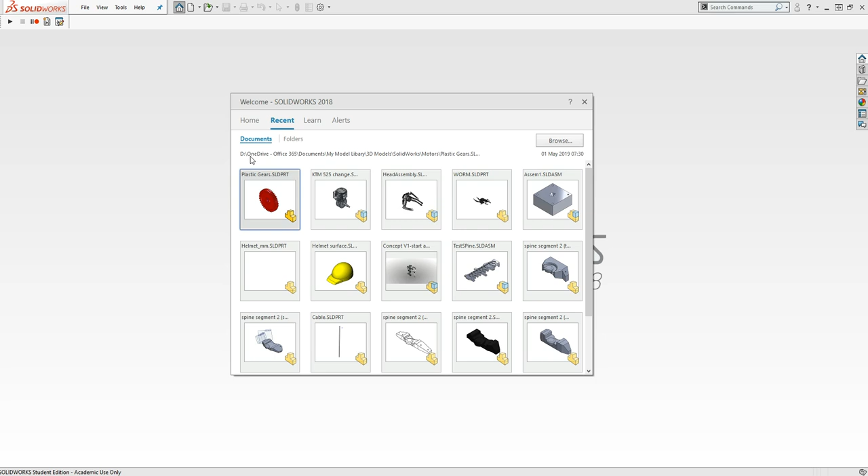Again, this was downloaded from GrabCAD - plastic gears, little plastic gears. Whoever did this did a cracking job, because all he's done is use design tables, so you can have the full range of gears in one part.

So those of you comfortable with design tables will know exactly what I'm talking about. I'm going to nip over to the configurations manager - click onto it, and you'll notice he's gone through every single option for these nylon gears. Cracking job, I'm really impressed. So I'm going to double click onto my 40 teeth configuration. Boom, happy days.

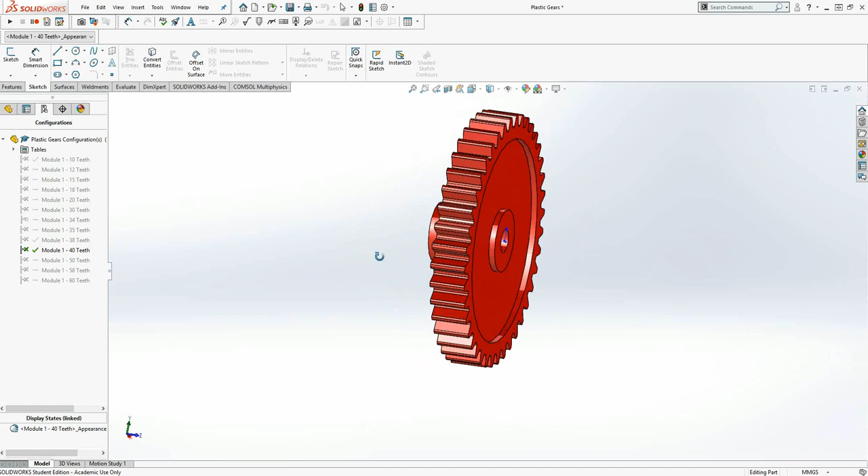There's a couple things I'm going to do first - just give it a bit of a spin round. What I actually need is I want MATLAB to do all the moments of inertia for me. I'd like it to be as accurate as possible, so I can play around and be pretty sure about what's going on with it.

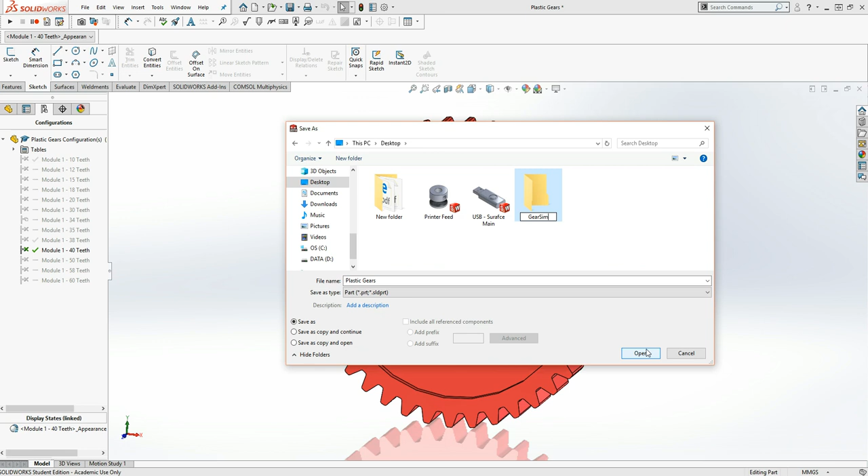So what I'm going to do is go to Save As, go to the desktop, and create - we'll call it Gear Sim. Double click into there. Now don't save it as a part - I'm actually going to export it as a step, AP214.

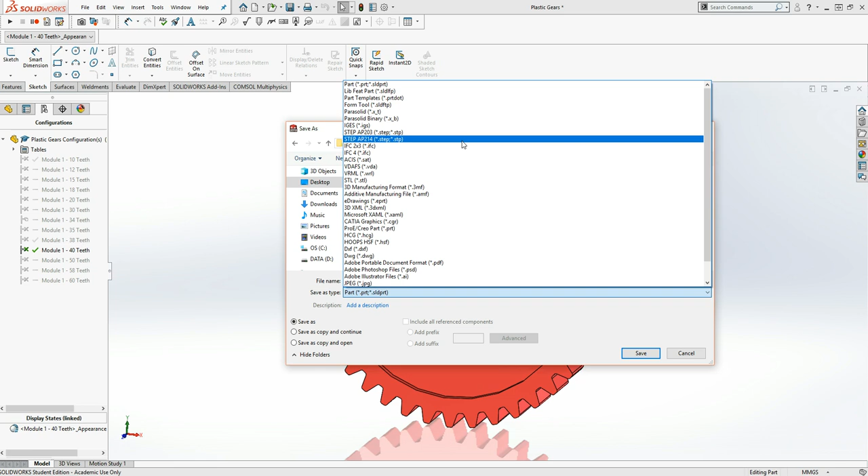The step files, they claim they're a lot more accurate - the resolution on the clouds are far better, and I won't lie, I've actually found this myself. They are very good, very good.

So I'm going to go plastic gear, change that, and I'll call this teeth 40. Save that.

To keep this as simplified as possible, I'm going to go from 40 to 10, so my ratio is practically at nothing.

So 10 teeth, do the same again - Save As, go to Desktop, Gear Sim, step AP214, and there's my step 40. Oh, I nearly overwrote it - I'd be very upset. And I'm going to change that now to 10.

Just to let you know, the reason it's doing that is because of the configurations table here. Technically this part has one name and is recognized as one part, but the configurations table allows you to have variations. It's great, I love configurations.

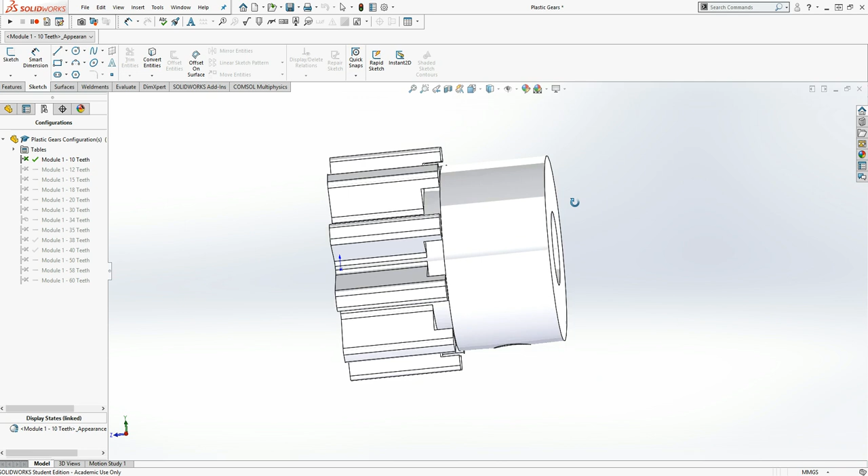Clearly, I think that's coming across. So I'm going to save, and now we should have 2 step files. Let's check it out. I'm going to double click into my gear sim - wrong screen - 2 step files, happy days.

If you've not done already, start up MATLAB. Once you've started MATLAB, sorry, I'm just getting everything in the right place.

So everything starts up. Now this is something you need to keep in mind and always remember about the paths. What we're going to do is tie all these paths together, so that when it runs, it will always look for the step file and can always import it. If you don't add the path to the step file, when you next run your simulation, it will crash. So keep that in mind - always add your path. So go back to Gear Sim.

I'm going to right click, scroll down, add to path. We can just go folders - I always go folders and subfolders. It's just because I've had some bad experiences before where I forgot to add the subfolders and it crashed, and it left me going berserk. So I do this even though the subfolders element is a redundant action, but I add it anyway.

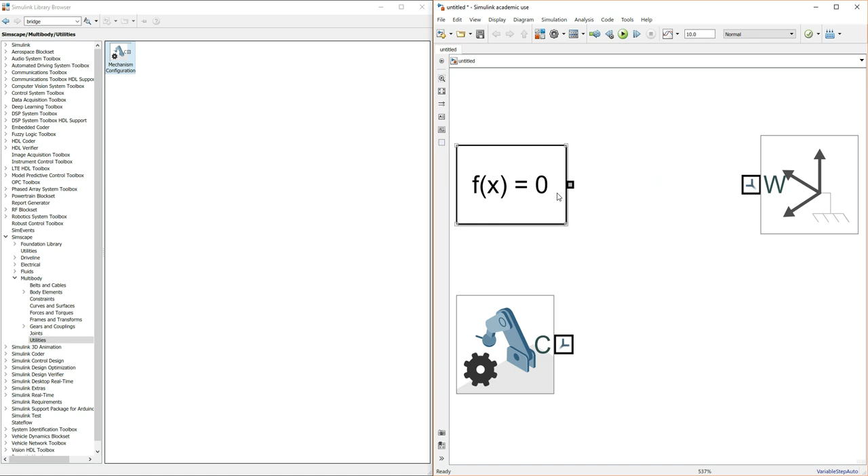So what I'm going to do, first things first, Simscape utilities - I'm going to use MATLAB's solver methods, because I trust MATLAB. Then I'm going to go to frames and transforms. Need a world - we need to establish where it is, and what that relation is going to be. Let's spin that round. And finally, if you remember, we need a mechanism configuration. Or I can spacebar - so I'm going to spin that round.

Now at the minute, because we're going to be driving through torque in this case, or we could drive through momentum - we could say what our angular momentum is. As you know, this system will allow us to choose however we want to drive it. It needs to be realistic, so don't start to think that you can measure torque in meters or measure fluid in millimeters. It's just a stupid, silly ratio, but you know what I mean, right?

If you remember from the last one, I was always talking about it needing to know exactly what that first level of relation will be. Now all we're going to do is get the 10 gears to interface with the 40 gears and then just drive. This simple process will allow us to look at how it interfaces, and if it's right then we can crack on. However, if we need to change things, it's quite easy, dead straightforward.

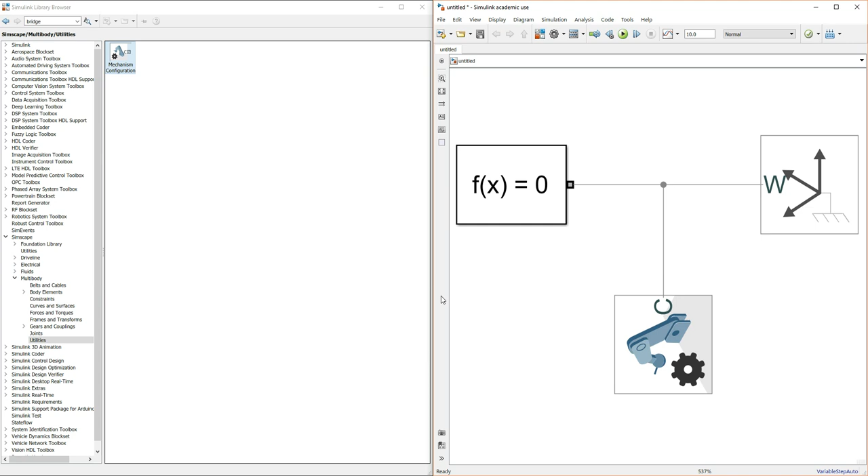So first things first, let's start bringing in that relation. So for frames - apologies, not frames, joints. I'm going to try and get everything to activate itself in the Z plane. You know what it's like, it just means I don't have to mess around with trying to figure out where everything's going to sit. It's me being extremely lazy, but one thing I've learned about this system ever since I was doing it for my PhD: try to simplify everything that you're doing.

You're simplifying this process as much as possible, because yes, this is 2 gears, but what if it's a gearbox? What if you're then looking at nubs between each point? What if you're looking at a new type of bearing? You want to try and prioritize that bearing, but make sure everything else has a simplified approach to it, because it's purely Occam's razor, where the simplest answer tends to be the right one.

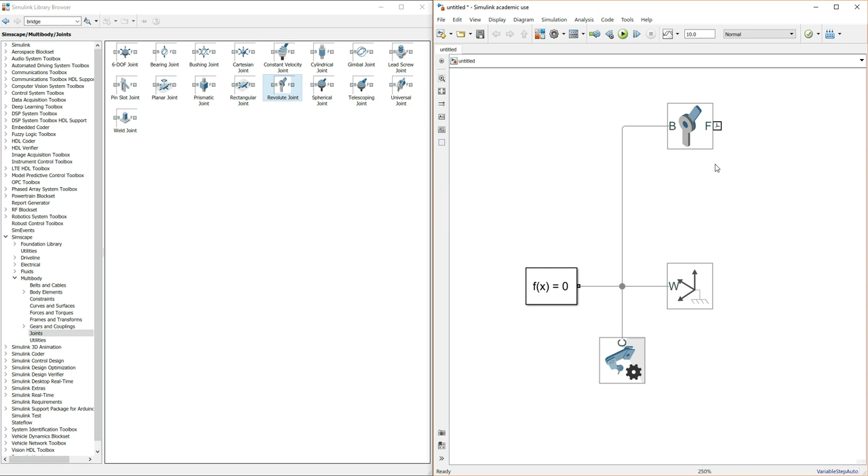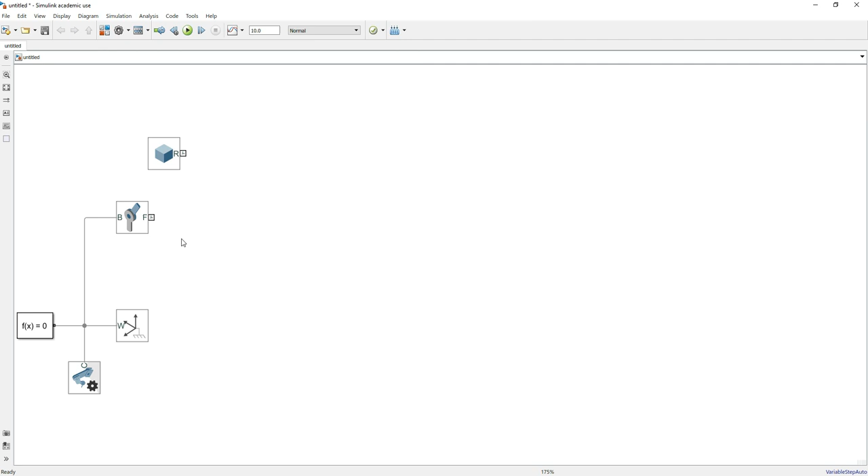So we've got our rotational joint. Next thing - all this is saying is what we're going to add to it will allow it to rotate. It's actually not saying anything sophisticated and sexy past there. What I'm going to do is go back to Body Elements. I'm going to bring in a solid. What I am starting to do now though is move a bit quicker, just because we've gone slow through a few things - we're going to move a bit more with some excitement to it. Now I'm going to rotate this round.

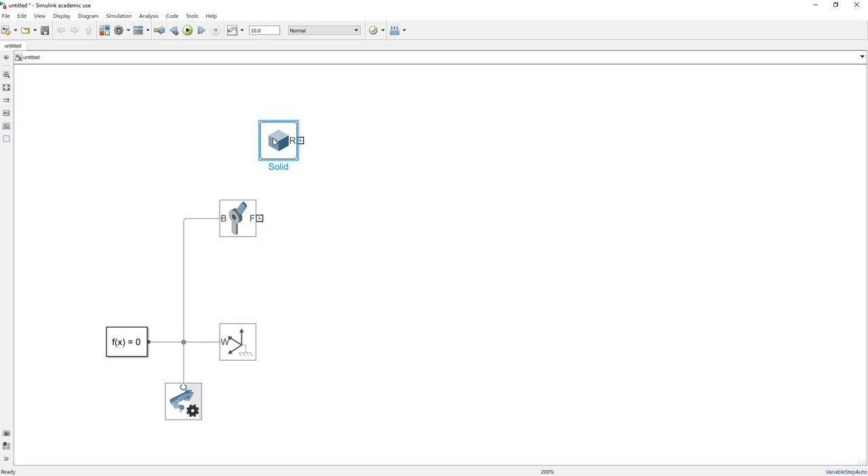I want to hang this off the top - you'll see what I mean. So I'm going to press Control and R. This brings it round. I always like to rename these, so I'll call this... now I'll call this 10 teeth gear.

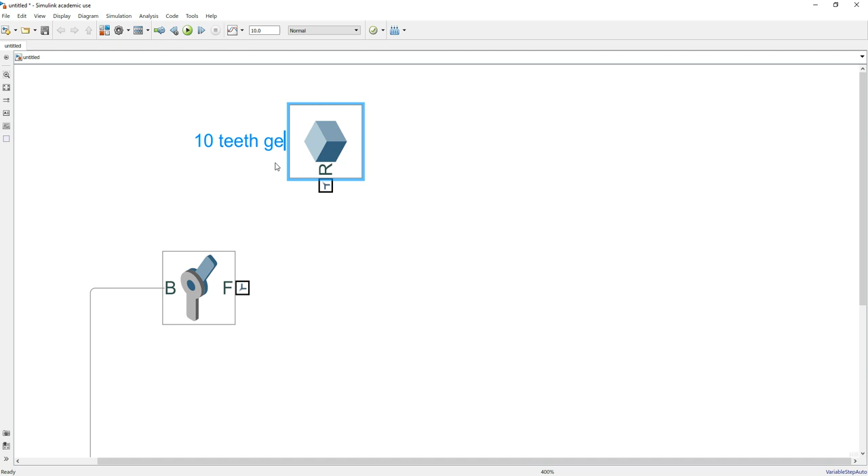It just allows me to have a clear definition of what I'm looking at, or else this is going to get very messy, very confusing, and not help anyone. So let's bring that in.

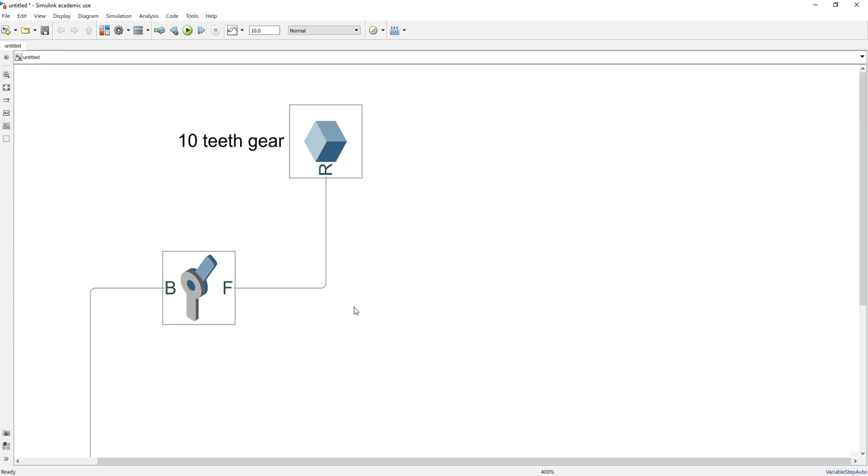Now, I know we've not done much of this, so first things first, let's take a look at the joint. So I'm going to open up the joint. Look at this beauty.

So let's open up the state targets. We're not going to change these, I just want you to see these. Specify position target - we can specify where we'd ideally want to be, where we'd ideally want to move up towards, or anything like that. You should remember though that when these specific targets are added to a position, it will just go to it straight away. And in these type of conditions, it actually hinders what you want to do.

Okay, so specify velocities - yeah, fair enough, running up to a certain speed. It's not too accurate as to how you'd want it to be. You do want a bit more efficiency to it, but it's nice as a test. You can run these up and just see if it's going to do what you want it to. It can be hit and miss with resilience to how it plays with other blocks.

For this, I'm going to actually turn it off. I don't want that, so I'm going to bring that back.

Equilibrium position - the ideal position. It will always desirably hit these positions at each time.

Now you'll notice everything's recorded as a rotational unit, purely because we are in a rotational element. This is simply saying everything that passes through this element will rotate around, hang on a second, the Z-axis. I was highlighting that just so you're aware. This purely rotates around that Z-axis, so always keep in mind that when you first add it, everything defaults itself to Z, and you are responsible to make sure these things move and change exactly as you want them to.

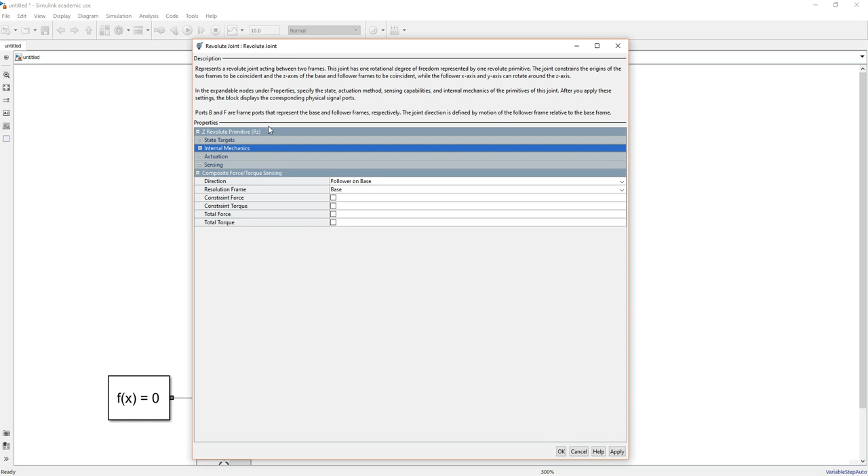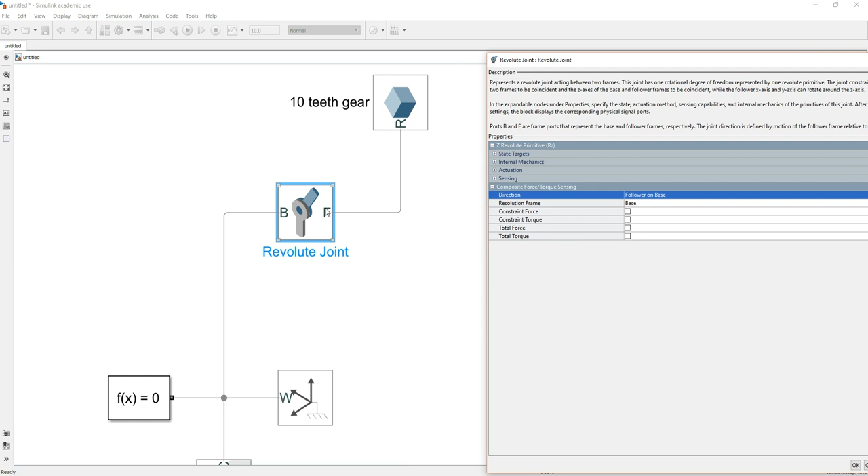Right, so let's just pull this to the side. Look at the base, then look at the follower. So if the torque's going this way, which in our case it will be, but it may be going this way, you just don't know which way you've configured this. So you look here, I can go look at base on follower, or you can go follower on base. And what this is implying is the tooth will be onto here, and then there will be a torque acting around here, because in essence, it's pulling it round. So these are some of the things to keep in mind.

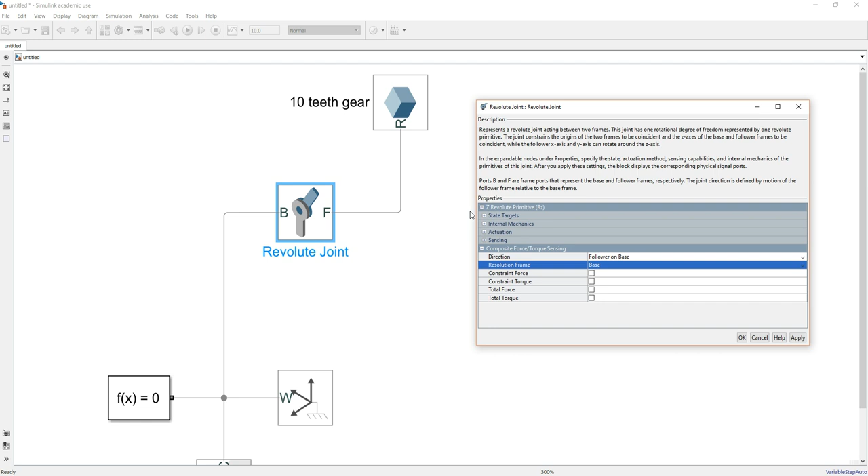So the lower ends here are quite interesting - the resolution, this is the main target of what you're looking at. What's the main focus that you want within it? The constraint force, the torque, the total force and torque - you can take from sensing and from the total that's coming out from your target. It just depends what you're more interested in. If you're interested in the stress around the actual joint, the bearing so to speak, that's what you can do. So let's move on.

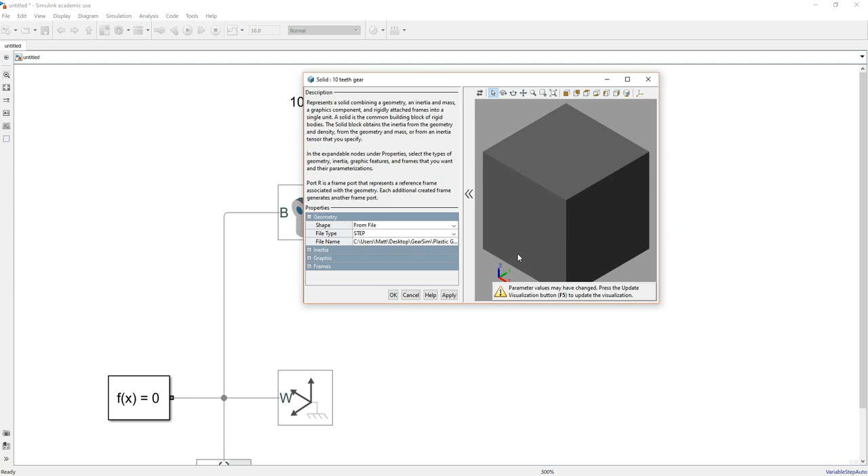Okay, into the tooth itself. At the minute it's on the brick. What I'm going to do is drop the shape, go to file. You'll notice here it's down a step, I want to stay in step. I'm going to go to my find, 10 teeth - I'm going to go 10 teeth because that's my 10 teeth step. F5, and there's our tooth. What I want to do though, I actually want to stay with the different colors.

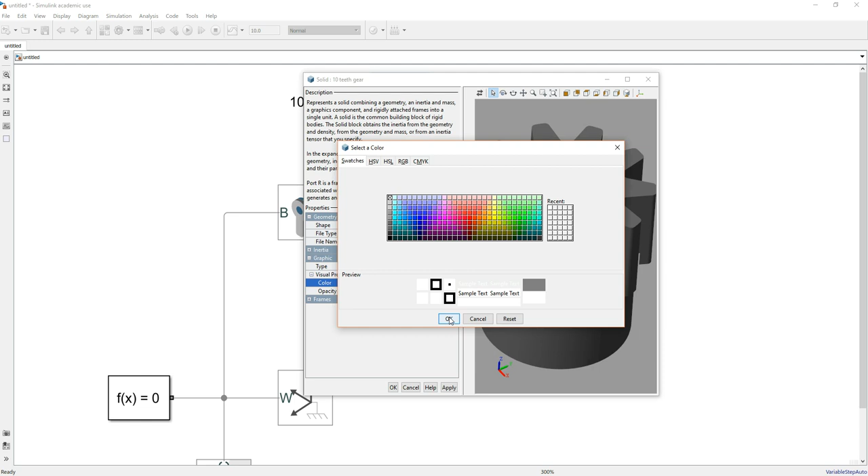Because it can get very confusing when these things are interfacing. So I'm going to go graphic, simple, and in here I want to change this. I'll probably change it to white. It actually stays then with what the original colors were, if you remember, in SolidWorks.

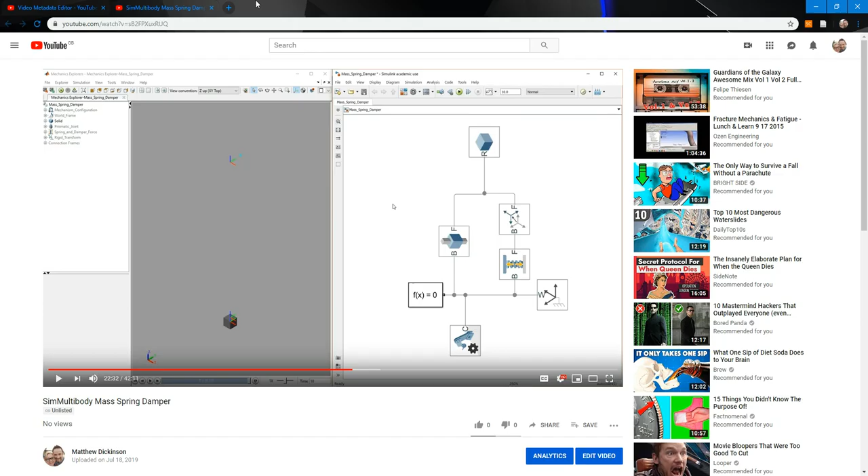Now, for the life of me, I cannot remember what the value was for nylon. So I'm going to go nylon density - 1.15 grams per centimeter cubed. So I'm going to go inertia, density, 1.15 grams centimeter cubed, update - all of the moments of inertia, products of inertia, centre of mass and mass are all pre-calculated. F5, and we are ready for business.

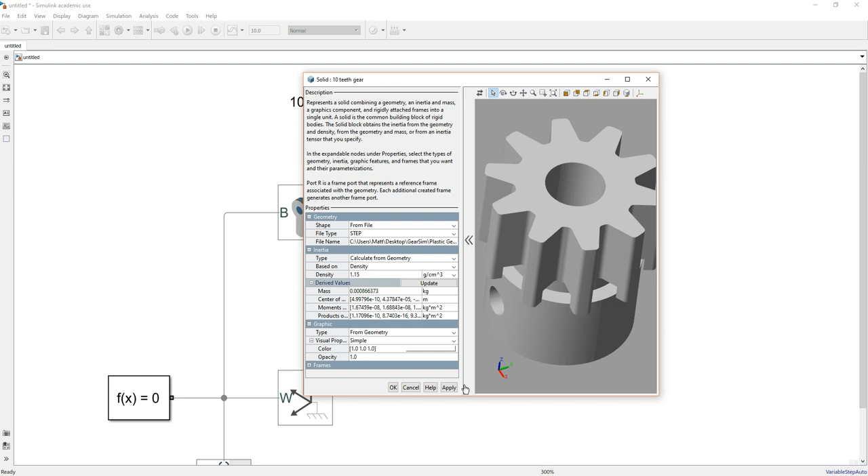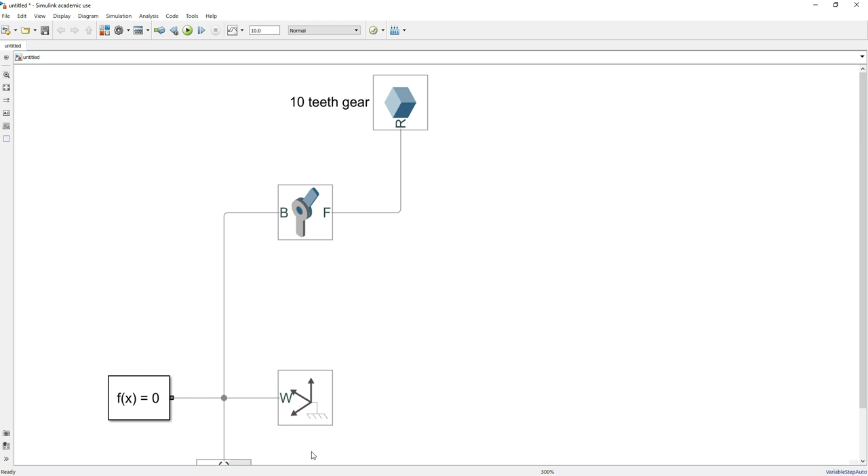Oh, I love this job. Right, so next step, we need to have the gear interface. This can be a huge pain, but let's try and make this as painless as possible. So let's go back to the library.

What we're going to do is we need that force and torques - I think it's under force and torques. Let me just check - no, gears and coupling, let's get these mixed up. So I'm going to drop my gears and go into gears. You'll see that you've got all these different ones, bevels, stuff, but they all function on the same principle of what we're going to discuss right now. So I'm going to go to common gear constraint, drag and drop this straight in there.

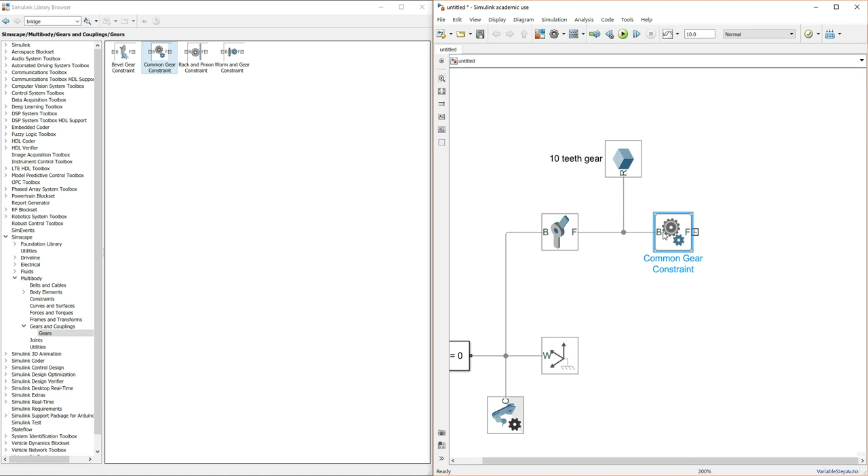And I'm going to lock this into position. Now we need to go back to SolidWorks in a couple of minutes, just because you need to be clear about why we're actually configuring these things and how, and in essence why we're doing this. So what I'm going to do is open up my gear constraint.

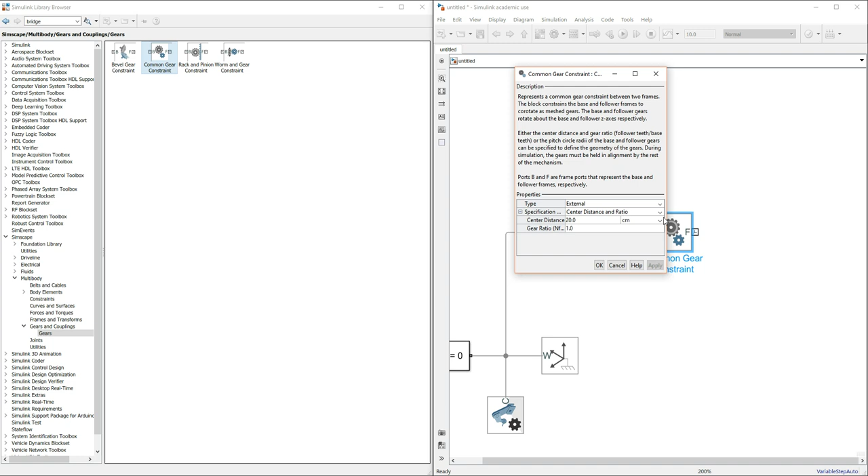And let's bring that up to the top, so we can go center distance and ratio with a gear ratio to the center distances. I personally like the pitch circle radii. So we've got the base - in this case 10 tooth is the base, and we're going to put on the follower, but let's just find out what they are.

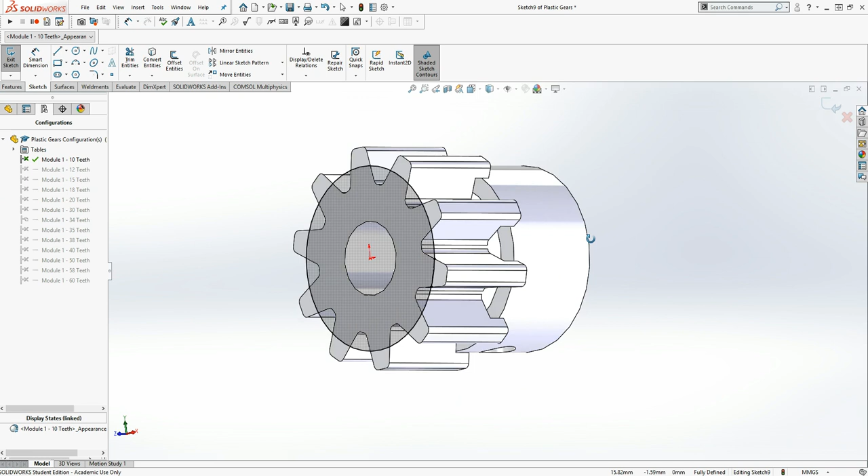So I'm going to go back to SolidWorks. So there is his gear, so I'm going to get onto here and I'm going to do a sketch. I normally put a sketch on these, it's only just because I'm a little bit lazy. What I do this for is, you'll notice I located that onto there. I'm going to put on a circle, come from the center, and I'm just going to bring it into that edge. This is not the most accurate way of doing it, so when we take a dimension from this, we need to find out what this is, and we will need to round.

So I'm going to go smart dimension, take it from this edge, and it's 9.93. So I wonder what the radius of that would be. So that allows me now to go back. Let's just go back, let's go big. Where the hell have I put that? Right, so you remember - 9.93, so we're going to round it. Ready? 5. Up here for thinking, down there for dancing.

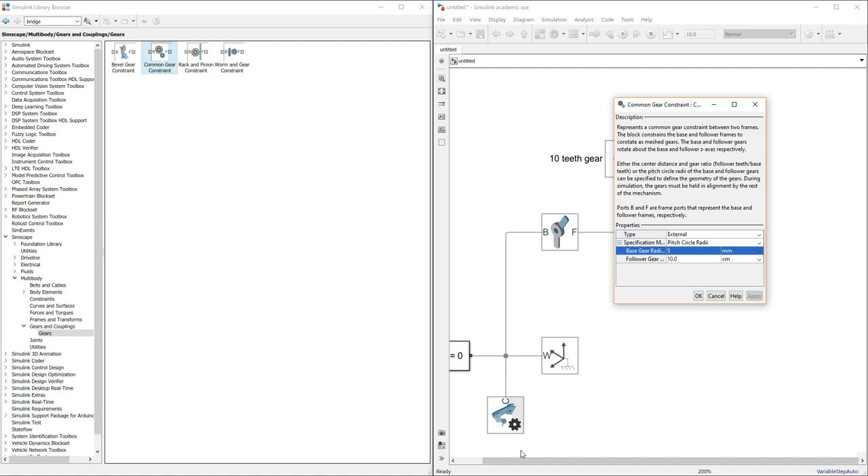Right, so we've got that on as base. We're coming in, we've got that. It now knows that the internal ratio for this gear that's coming from the 10 tooth, that the radius from it is 5 millimeters. You'll notice I've just changed these to millimeters as well - it's just because if I don't, I will forget, and then we'll end up with a really weird simulation. So I'm going to go back again. Now we are using - I've forgotten which - oh, come on, you swat. There we go, right, so now we are using 40 teeth.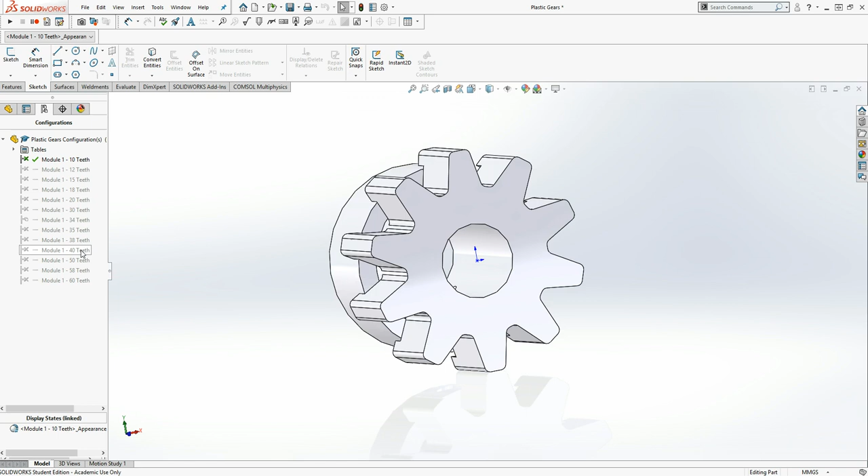And what we're going to do is go smart. I know what a lot of you are thinking - you're thinking, yeah, but it's a 40 tooth, it's obvious, but what if you come across a different time, what if you need to measure it a different way? I'm just trying to show you how these things interface, so if you are screaming at me, don't.

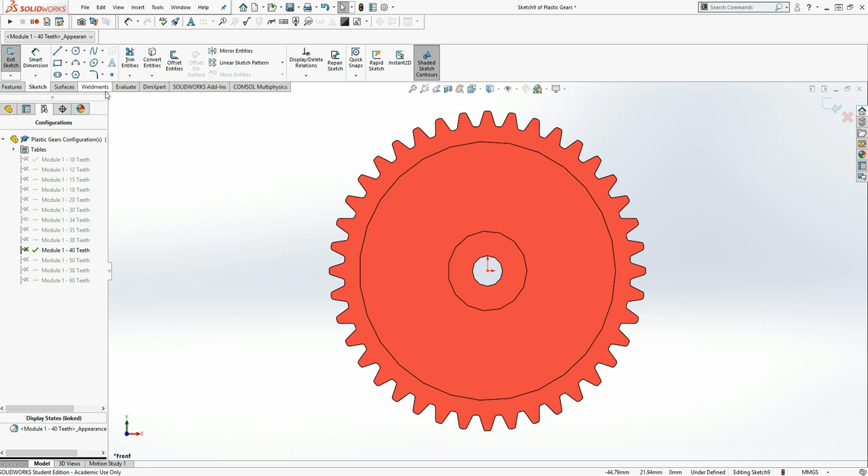Right, so I'm going to do the same thing again. Just draw a line across, gives me that centralized point. Happy days. I'm going to draw a line to my midpoint, which will be my pitch. I'm going to take my dimension, and like magic, it's 19.98, which instantly tells us that radius must be 20. Has to be 20.

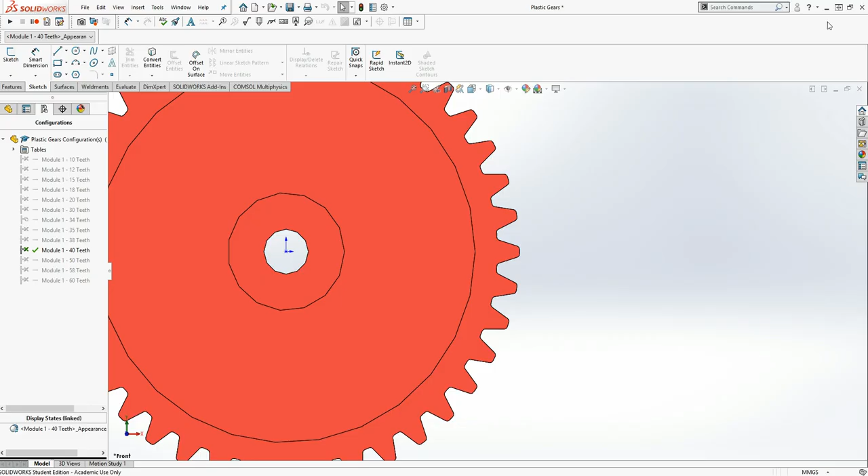So let's go back onto that radius, we're going to go 20. So we now know, based on the base, the base gear is the 10 teeth, the follower tooth is the 20 tooth, but it's the radii, not the diameter, so keep that in mind. A lot of people do look and go, I'm sure that was - trust me, it's the right one.

Right, I've right clicked, so I'm copy and pasting. Now what I'm going to do here is change this to 40. I'm going to remove that one from the front. So what I did again is right click and then drag out, and it's a super quick way of copy and paste. So if I go right click, right click, right click - you get the picture. If you don't want to do that, select it, Control C, Control V. It's just a quicker way of doing it.

Right, so let's get into here. Issue that we've got is we're still registered under the 10 tooth. What I need to do is change its location, 10, and we're going to go 40. Really, I could have changed the actual title, that would have done it.

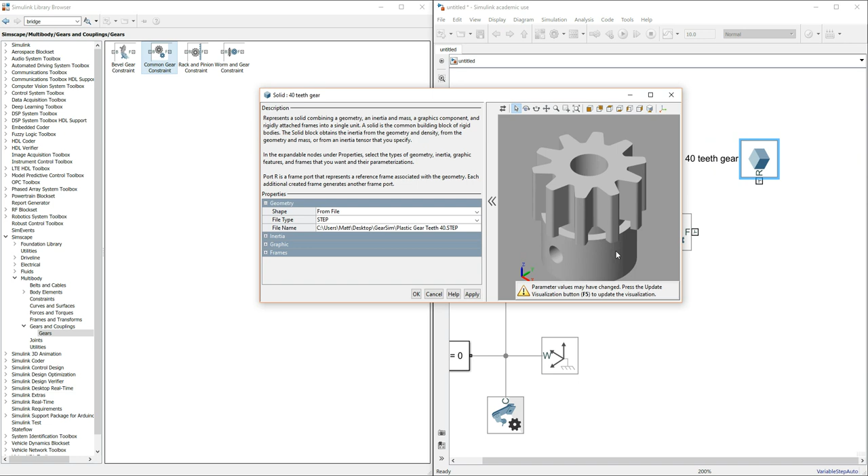Bring it round. Now again, you'll notice that we're in white, I want to change that. I'm going to change that to the red - not pink, red. Ah, that'll do, well we'll find out. Let's go F5. Yeah, that'll do.

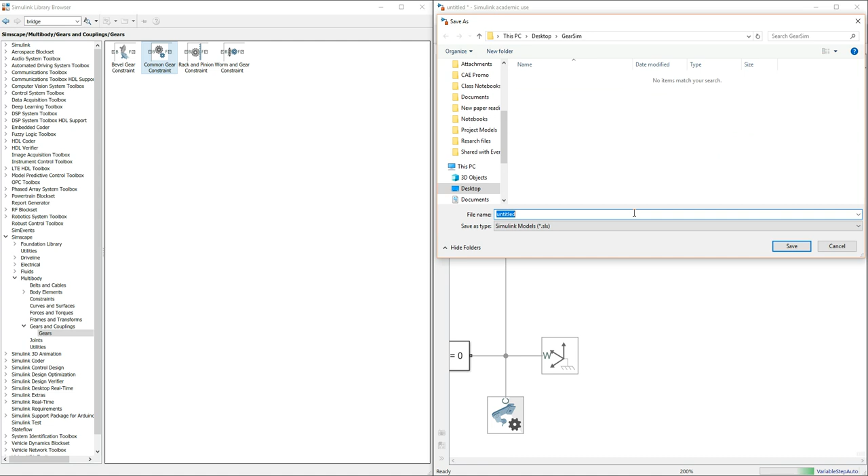Right, so I'm going to connect that to the front. Now let's save this, we're going to call this - I'm going to call this gear teeth, or gears. Sodding gear teeth, I tell you. Right, so that's gears.

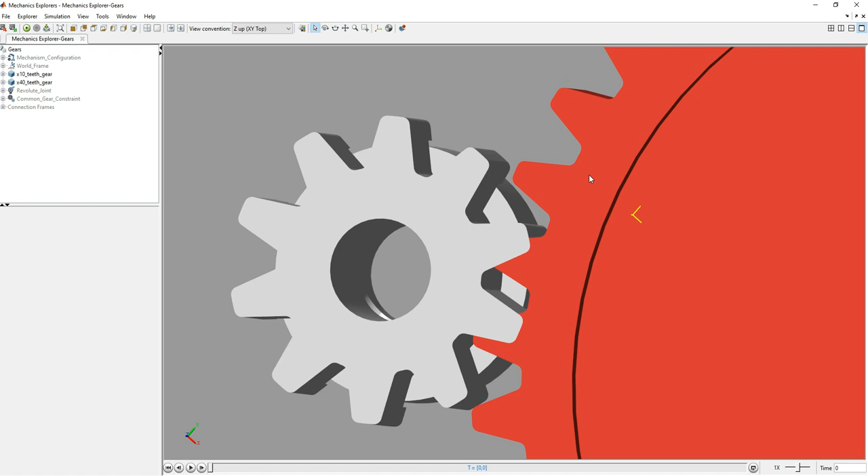And let's see if this is going to work. It's going to hit run. Yes! Look how well that's worked. I'm just messing - I meant it to do that. Right, that's exactly what I was looking for. I mean, I'm not trying to be the world's worst comedian. That's exactly what I was looking for.

There's a few issues in this that we need to fix yet. We need to, in essence - this doesn't know how it's going to move. Don't forget, this gear here knows it can move round. This interface between the common gears knows that they're interfacing. So this 5 to 20 has been put into position, which is bang on. Happy days, but still it doesn't know where everything's going.

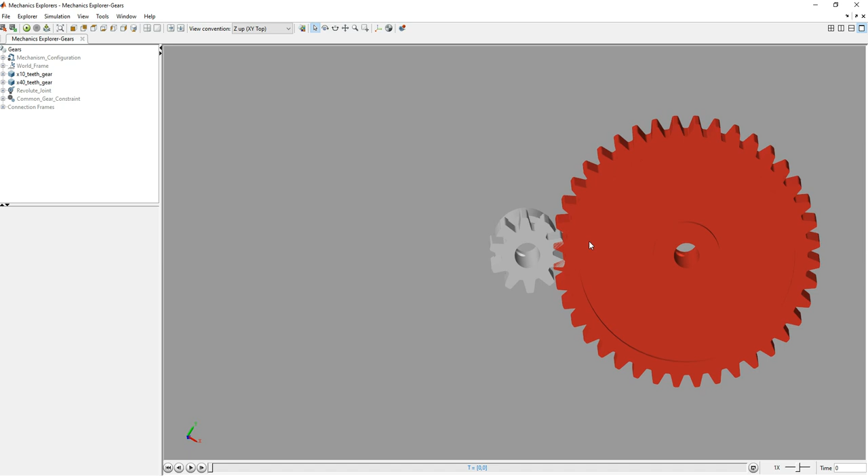So we're going to have to go back - just delete that. We're going to have to go back and put things back. Right, so now we've got this joint here, so I'm going to right click, drag. This is where it gets a little bit confusing. So I've got a joint that's interfacing - this is my base, this is my follower, I'll think of it as back and front.

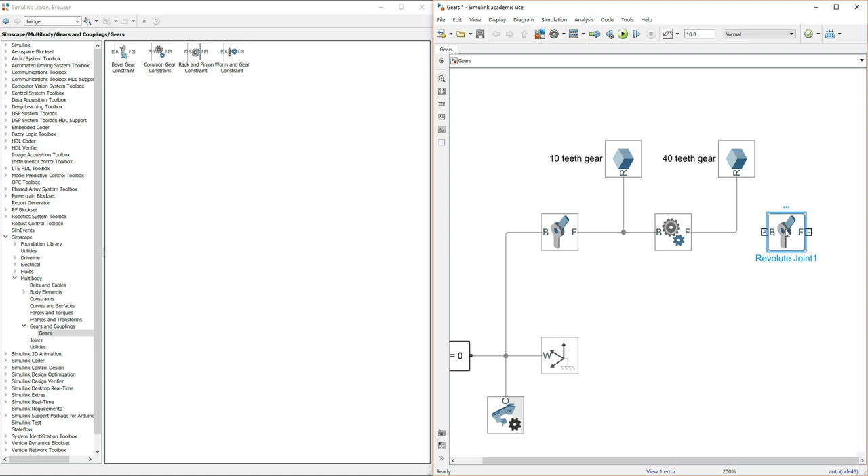I want to replicate this behavior here, interfacing with this gear and mirroring it across. So what I'm going to do is select the gear, select the joint, spin that puppy round, and I'm going to connect it to that point. This is purely because I need the common gear constraint to stay in control of everything that's going on, and because they all meet in the central point here, it means any changes made will always be mirrored across from both sides. It will be able to pass between the two, which is ideal for what we need.

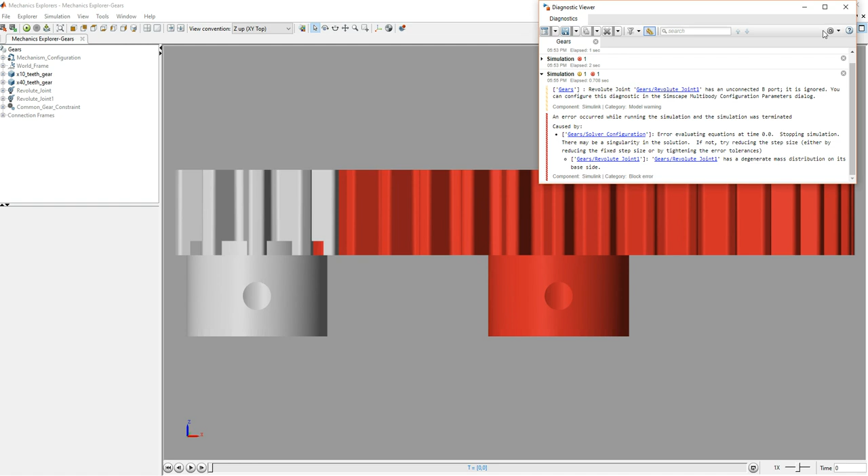Right, so sadly it still doesn't work. What we need to do now is we need to consider - well, in fact, let me just run this. I want to show you why it won't work, rather than just ignore this for the minute, because it's going to complain.

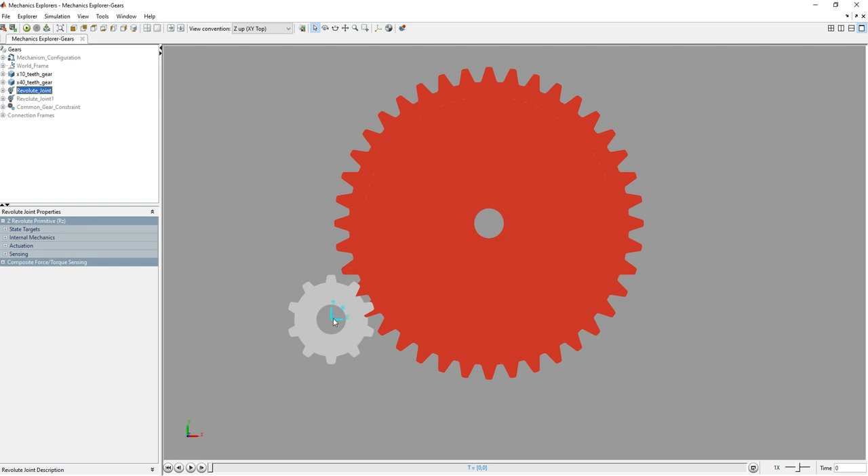This is one of the biggest problems that students, myself, everybody I can think of, have ever had before. We need - think about this rotational joint here, this is fixed at the world, it knows that this point is not going to move. We want to recreate this over here, but technically, if we go back to the drawing, if you look here, it goes in and then it says it's revolving, but it doesn't know where the hell it's going. So let's try something - bring this in. So by theory, could we not just connect it up and make a loop? Let's try running it now.

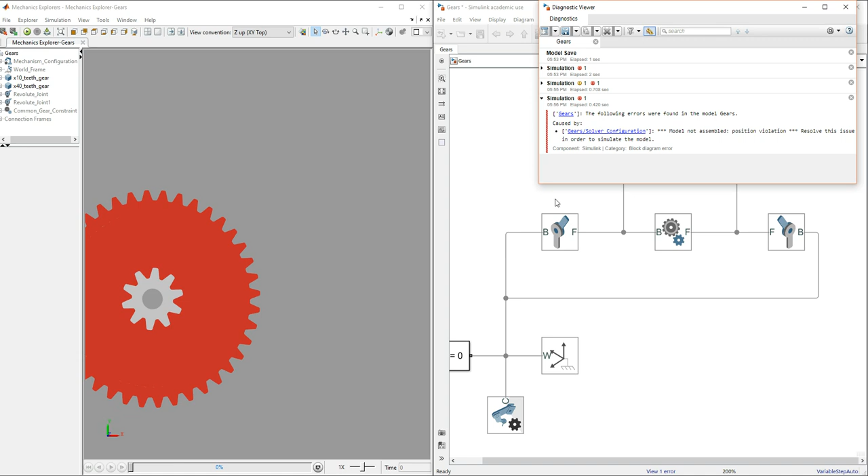Okay, so what the hell's happened now? So I spin this round. It's now sitting central. It's brought in an error because it's saying, well, I'm 25 and this isn't 20. It's just confused, it's not clear about how it's moving. So instantly it kind of looks and goes, I have no idea what you're trying to do, you're being a dick. So I'm going to delete that and run it again.

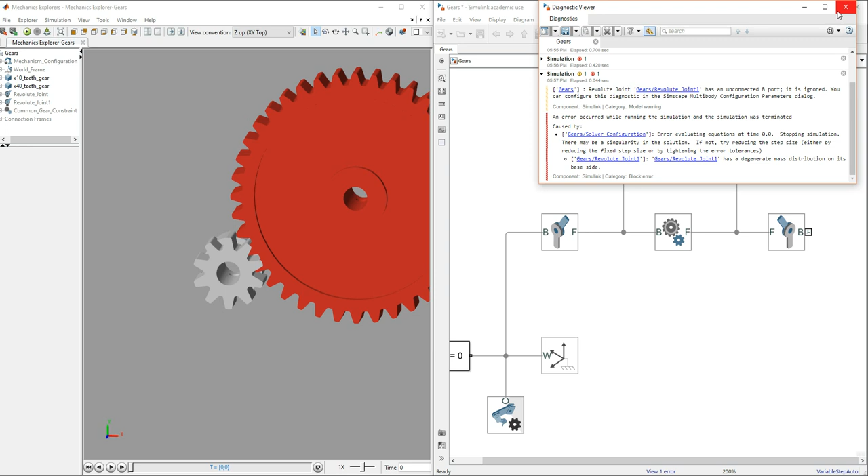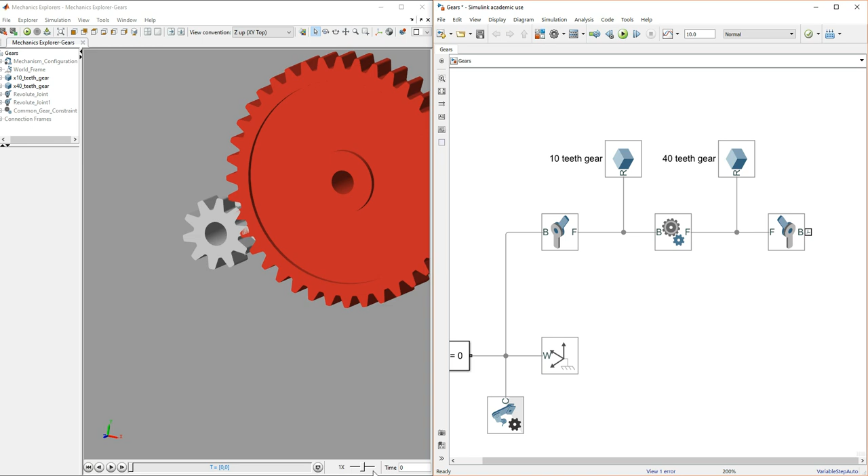So this now means I need to find a way to allow my joint to be at the distance I need it to be, and then translate back in. I know, right? Very, very annoying. So what I'm going to do is go back to the actual frames, come back into the library.

This library again is your saving grace. If you're not comfortable with this, I'd always recommend running through this again and again and again, getting really confident with it, because it is your ultimate saving grace.

It really is. So what I'm going to do is go to my frames and transforms. What this allows me to do is move things around. I can move along components to say this joint is sitting here and this joint is sitting here. It's what we need to do. So I'm going to drag and drop.

Now, this, what I'm saying is this joint's going to sit here. What I need to tell the system is that this joint is sitting over here. So what I'm actually going to do is say at the base, this point, let the gear, the common constraint gear, control it. So I then bring this in. So then once it comes in, what it says is, oh, it's alright, this one's controlling it.

And what we're going to get the rigid transform to do is return it back to home, which is where this started. So then I'm going to drag this and connect it. Now, granted, I've not shown you what the rigid transform is yet, but let's double click in.

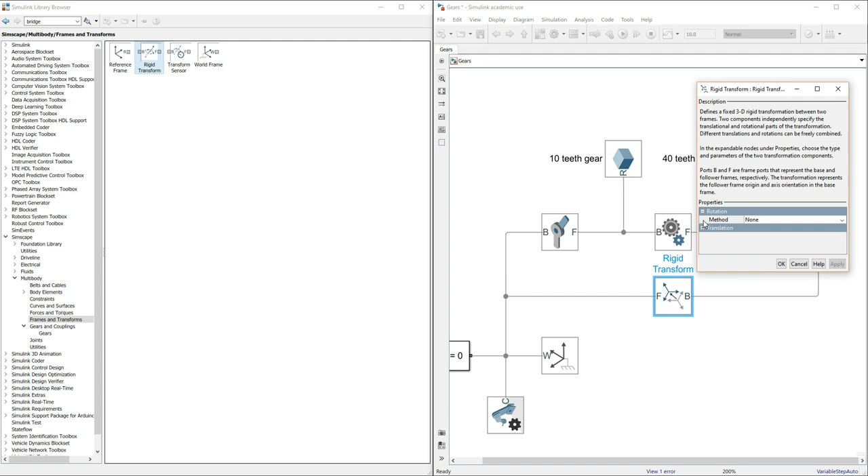Rigid transform is simple. So think of it as an axis, an ultimate axis. You can say where things move, you can say how something translates. I can rotate the axes, I can tell it, you know what, don't use Z, use X, use Y. We're going to use these again and again, but I can go all over with it. Or I can translate the relation from one to another position.

Now with translation, all it's referring to is a distance across. So if I go down to translation, it then goes, okay, so you got translation, how do you want to do it? I'm going to go standard axis, so I can go Cartesian. For those of you who don't know, Cartesian is X, Y, Z components in millimeters, yards, feet, miles.

I'm going to drop that down again. I'm going to go standard axis. This basically says, okay, if you're going to move something simpler, shall we just move along one of the components? And ironically, because we're doing gears, why the hell not? It should do the job perfectly.

So I'm going to go millimeters for an offset. And I'm actually going to move it. I'm going to try for a start of moving it minus Y. So in any other stuff, you've always known that you've got minus or positive based on the component axes. The same conditions, but with this it likes you to define plus or minus. If you've got Cartesian, you actually put the minus in. So it's just things you got to get used to doing.

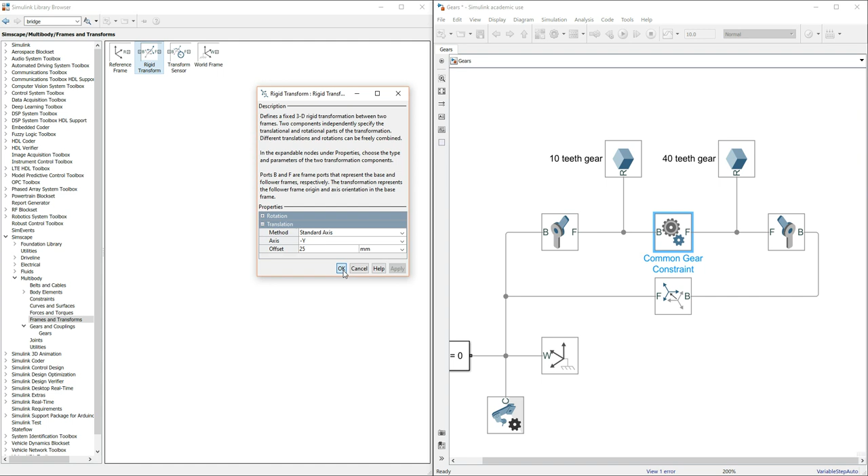So let's see if that works. Oh, what's happened? Ooh. Oh, now that's a good start. That's a very good start.

I mean, what I'm going to do is just run that once more. Now, the reason I say it's a good start is nothing's crashed. And it really is like that. You kind of look at first and you go, oh, nothing died, everything's running, it's working. And in essence, yeah, that's what we can rule out with it at the moment. But we need to move forwards.

So we've got these components. The first thing I do not like, which I'm sure a lot of you have already seen, is I need to zoom in.

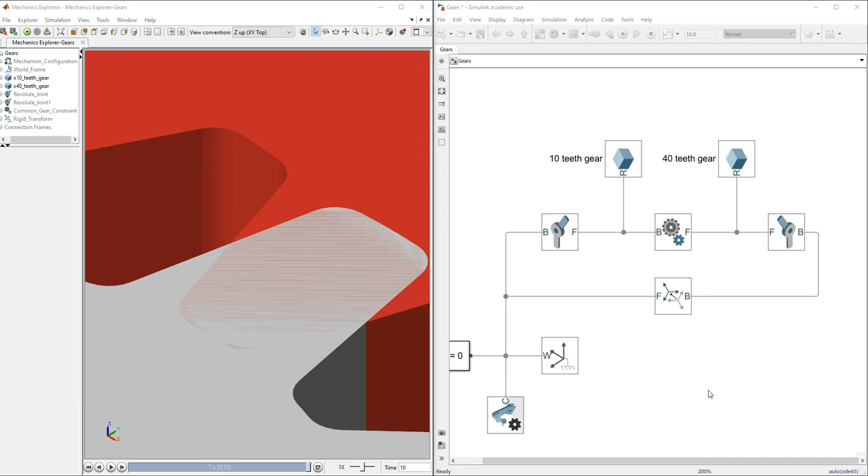Not a fan at all. That is not what we wanted. That is very frustrating, in fact. Very frustrating. Right, so let's try and fix that.

Now I should point out this is basically a visualization of what it is that we're actually doing. But when you're running a simulation, there's nothing wrong with trying to make sure that it's tidy, it's well presented. This is not well presented. In fact, it's a bit poor. So I'm going to right click, copy that across like that.

Spin it up. Don't forget, this is a translation tool. This will allow me to move stuff. So let's get into translation first, and I'm going to get rid of it. So I don't want any translation. I don't want it to move along the axis.

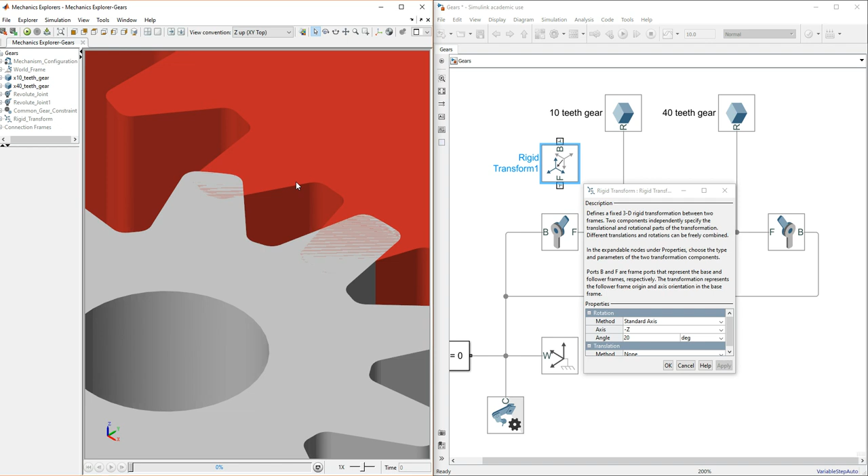Rotation, however, again, I'm going to go standard axis, and we're going to go, let's have a look at that. Given where that sits, I think I'll actually move in the minus Z component. You could go in the positive Z because it does look quite central. And I'll go 20 degrees. If I measured this, it will allow me to be even more accurate, but I just want to see what it's going to do.

Let me just come back out. Don't forget, the base is saying from the original. Then the follower is actually saying the new position. So I'm going to spin that round. I'm going to lock that in. Right, now try it. There we go.

I mean, really, it's still a little bit connected. Yeah, it is still a little bit connected, but let's move forward. So I'm going to come back in, and I might just let's go 21. See if that helps it. Yeah, I think that actually hindered it. I'm going to go back to 20. It's going to stay with 20.

I could go back and measure it, but what I'm interested in here is that. So I'm just going to hit run again. Excellent. Now I know it sounds incredibly patronising when I'm running, but the only reason I'm very pleased with that is that it's not crashing. It's working. It's doing its job.

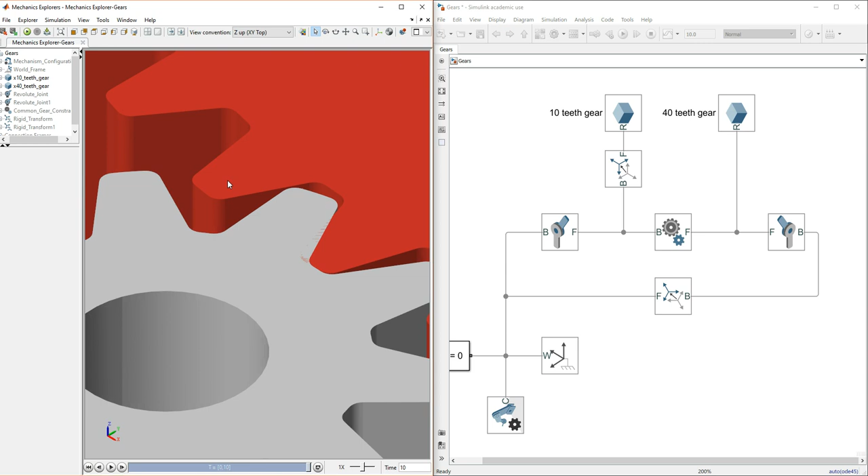So let's start introducing something. Now, for a nice test, I often like to run, just as a test, to make sure this is running. So I'm going to come into here, and I'm going to say this is the point where my motor is going to be interfacing. I'm going to double click in, and remember when we're looking at state targets, I'm going to go velocity.

Oh, 5's already in there. So in fact, I'll go 10 degrees per second, and then I'm going to run it. Nice. Okay.

So I'm going to go. What I'll perhaps do is, if this is my gear, I'm going to double click in. This is my motor. I'm going to go sensing, and I'm going to do an automatic computed. This can often crash, so I just need to check if this is going to work first. Yeah. It's to do with the degrees of freedom that's present within it.

It's a bit frustrating, really. It is really frustrating. We can do it if we provide an input, which I mean, to be fair, we probably would have to provide an input.

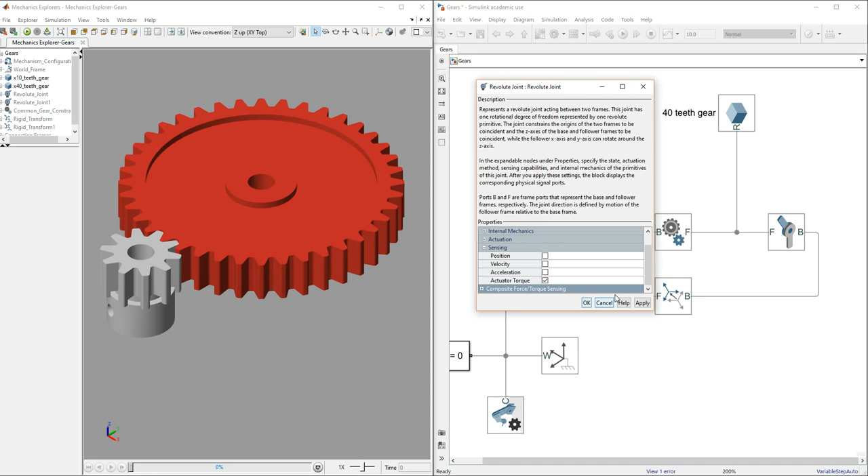Let's bring that out. Now, because we have weight acting on it, what we'll do is we'll go to sensing. I'm going to go to actuator torque, apply, and bring that out. Now you see, now we've got this little bad boy here. This bad boy is in essence now looking for that PS-Simulink converter.

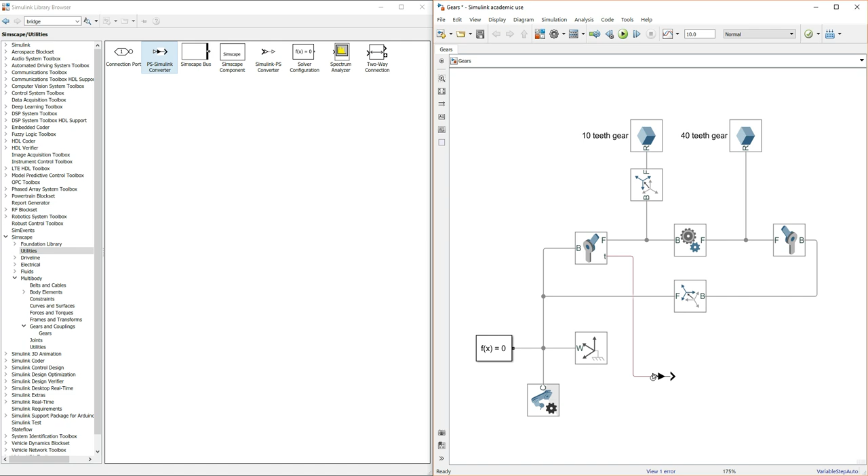That's great, because what we're going to do is go back to the library, swing straight back into the library, and we're going to go to Simscape Utilities, and we have PS-Simulink converter. What we do is bring that straight up, and we're going to locate that round, bring that into position. And then what we can do is, well, we can actually set the units in there if you remember. So I can go Newton meter or whatever, but what I'll do is keep that a solid state for the moment. I can change that, I will do.

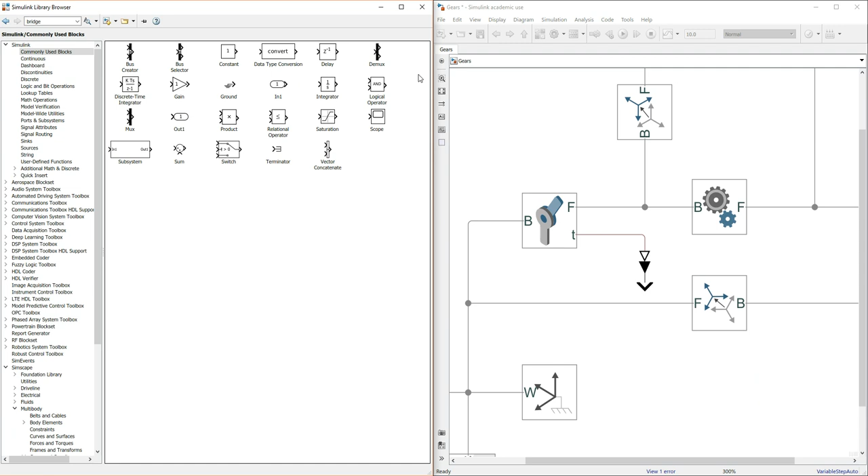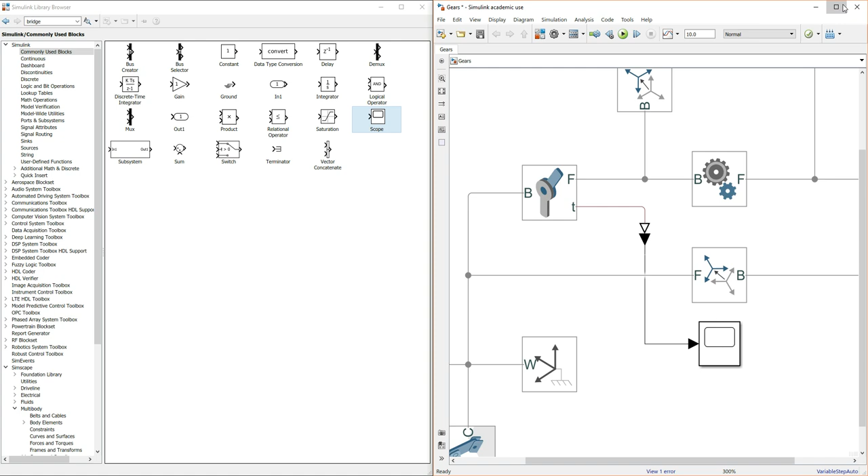So I go back to Simulink, and I'm going to bring in commonly used blocks. Go to scope. Just going to go with single port, tag that in, and then just zoom that. Then let's run it again. Nice. So let's bring in the scope.

Yeah, look at that. It's done a cracking job. There's not really going to be much there. It's just purely because it's trying to pick up on elements, and we could try. Let's try on a total torque. The only trouble is with total torque, it can be a little bit of a pain, really. So it's purely because there's no real drive behind it that this is emerging.

When you look now, what this is doing is it's recording from every single component. Interestingly, this is to the power of 7. So in short, not much, it's just because there's not much there.

So let's bring that back, bring that torque into there, come back onto there, and then let's get to sensing. I'm just going to remove that total torque. I don't like all these messy wires, I'm a bit of a silly sod when it comes to messy wires, things like that. That's what I'm about to add.

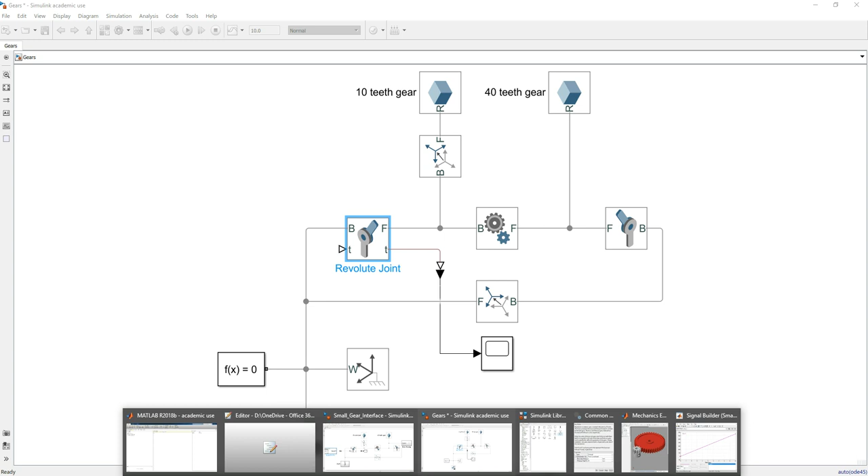I'm going to go back to the Simulink library, come across, and let's go back down. Let's go to utilities, and we're going to go from Simulink to physical signal conversion, which is in essence the replica to the other one we were using. So I'm going to bring that in, and this one's a bit more trickier, because what we need to do is we need to tell it that it's going to be behaving like a motor, do what a motor would do.

Basically, any motor will have a second order behavior. There are coils within it that gives it that overshoot and that damping, the spring behavior. We don't have to put that in, and we're not going to, but we're just trying to provide a filtered input so we can let MATLAB do that for us based on what's driving into it.

So I'll go filter input, derivative calculated. We're going to go by first order filter. Now a first order filter would imply that there is no mass applying to it, it is simply two components of a K and a C value. So what I'm going to do, drop that down and go second order. Now we have that mass spring damper effect, but it's the effect, it is not a spring itself.

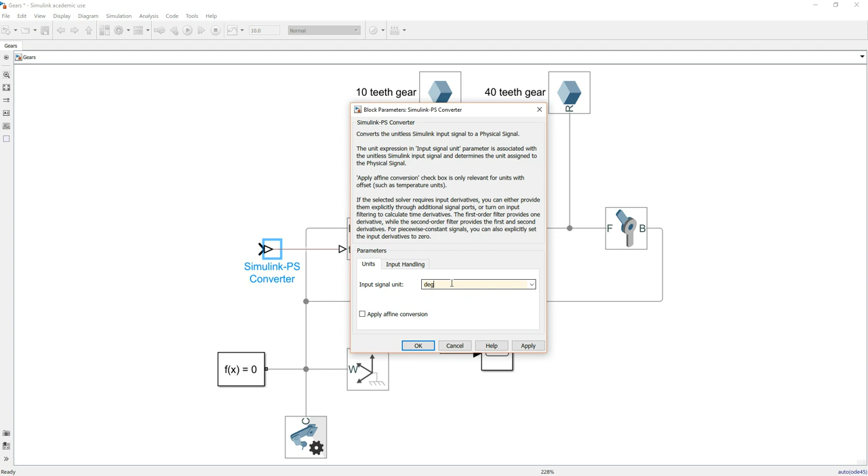So I'm going to go back to units, and in the units what we've got is not what I'm looking for. If I click on here, if I can't find it, I can always say you've got it wrong, I want degrees. Apply. Right, so now what we're going to do is we're going to bring in a signal builder.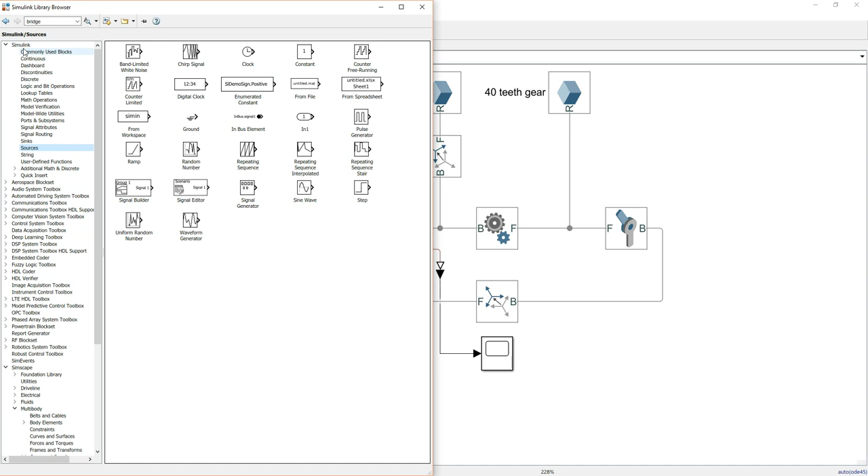Signal builder, scroll back to the top. Going to go sources, this is in Simulink. Bring in, drag in and drop a signal builder. This will allow me to design, in fact it's what's jumped on the screen a second ago. This allows me to decide how the motor behaves, what level of degrees are put into it. It's not an engine, don't forget, we're looking at how that motor interfaces, so I'm going to double click in.

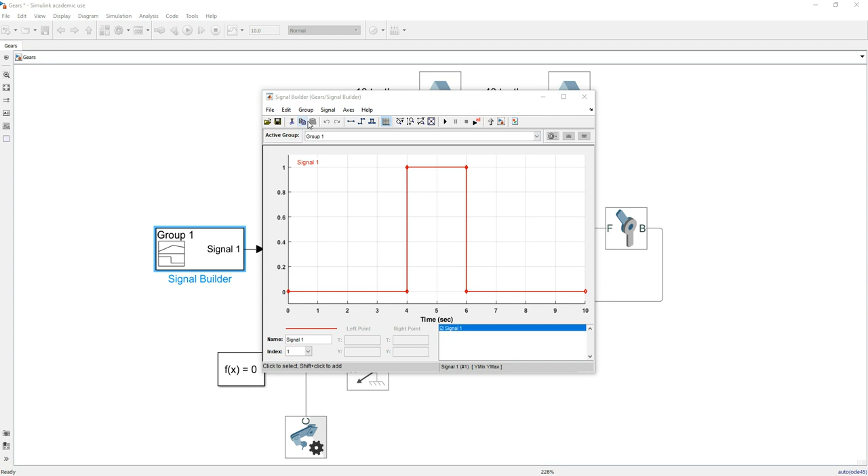Now you'll notice here I've got all this square function. It's not a square function that I'm after in this case. What I'm after is I just want the motor to move to a present set, and I want it to do is move sensibly. I don't want it to move like it's going 300 sodding miles an hour. So I'm going to change that to add constraint constant signal.

This signal here, clicked on it, right click, delete that signal. So now we've got a signal basically backwards and forwards. I'm going to left click once on the edge marker here. We've got time finishes at T, but we have Y.

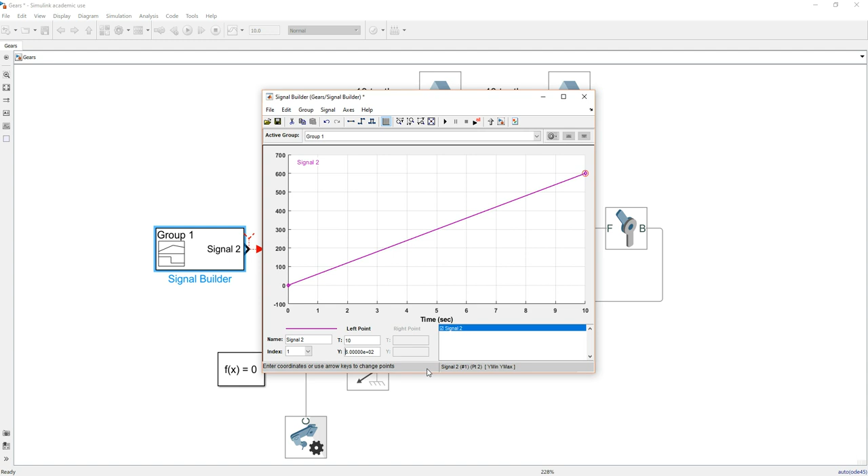Now what I was messing around with before, this is crazy, I ended up putting it, God, I think I'd have to double click it back in. I think it was 600 degrees, I was just playing around, just looking at different values. So bring that back out, get rid of this, and then let's connect that. So let's run it.

Right guys, yes, I just realised something. Wonder why it crashed. I've just made the most stupid of mistakes. I'm actually trying to calculate the torque, and I've just said I'm going to actuate it. What a wally. Right, what I actually want it to do is tell me what that torque's going to be. So I've double clicked back into the Revolute joint, and in the torque here I've now changed it to automatically compute.

What I'm actually going to do is I'm going to drive the position of the motor, so motion is now provided by me. If I add that in, what you'll see now is it changes from torque to Q, which now refers to its rotational behavior. So if we run this again, it's the type of behavior it should be getting.

So let's have a look how the torque gets on. Okay, so let's analyze this further. I'm going to bring this down. I'm just going to look at this.

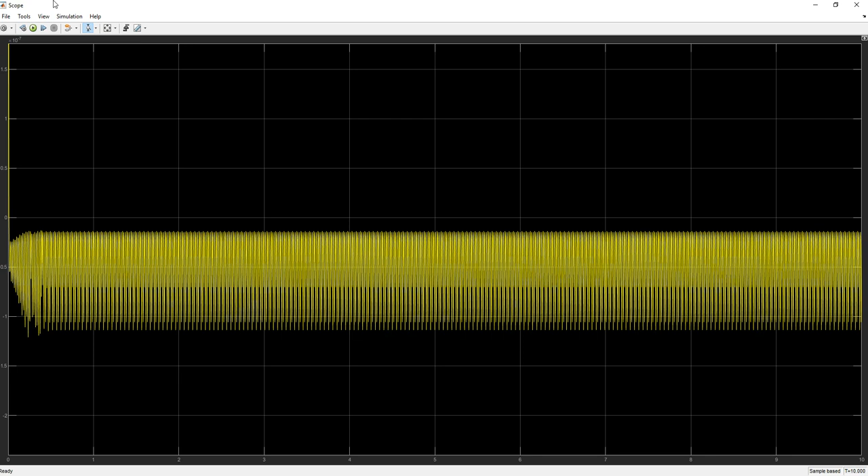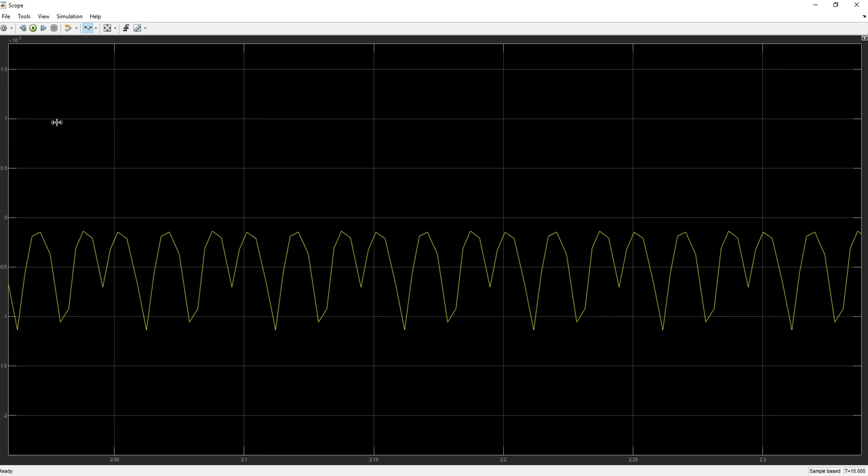Right, so let's just swing back to this point. This is our most important point. This is the momentum, you've got to think about it. It's going to apply that momentum, and you're going to get an overshoot on it. If you do not have enough power in a motor to achieve this overshoot, and you really need to tidy up those time steps, but if you don't have enough power there, what you'll actually end up with is it will fail to do it, and the motor will draw more current, and you'll end up at a point where it will stall. Some motors will continue to try to deliver it, they will heat up and could burn out. Some motors will just cripple under the force that's been applied. If you've got too much weight acting on something, the gearbox supporting that will cripple and not survive. You've got so many variations that can occur with it.

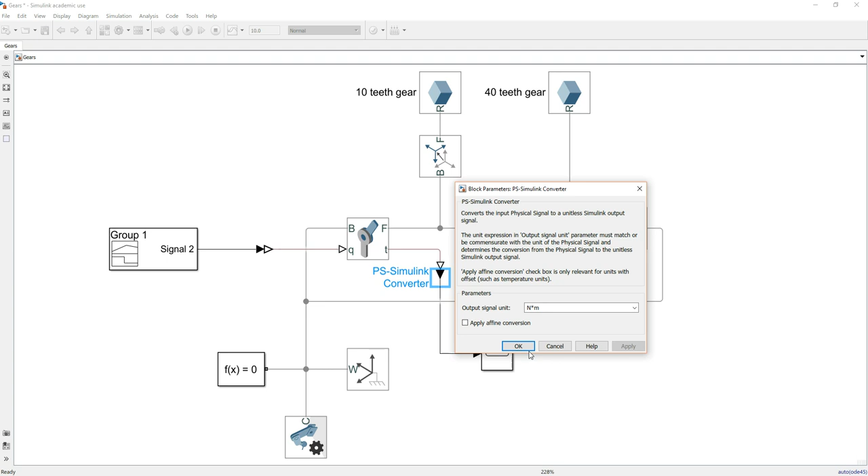So let's just take an estimate of this. We don't know what units these are actually in, so let's get back into here and set some units. Let's go... Newton meter. Let's try that.

So this is in Newton meter. Okay, so this is 10 to the minus 5 Newton meters, so this is 0.0005 Newton meters of torque at the highest point over here. But it's actually just beneath 4. So in essence, if we went to the shop and had a look... let's see. DC motor torque.

So we're going to go, let's just go 1 Newton meter, might as well. I mean, look at that. So what if we went 0.5? 0.5 Newton meter there. Wow, yeah, we don't need that much.

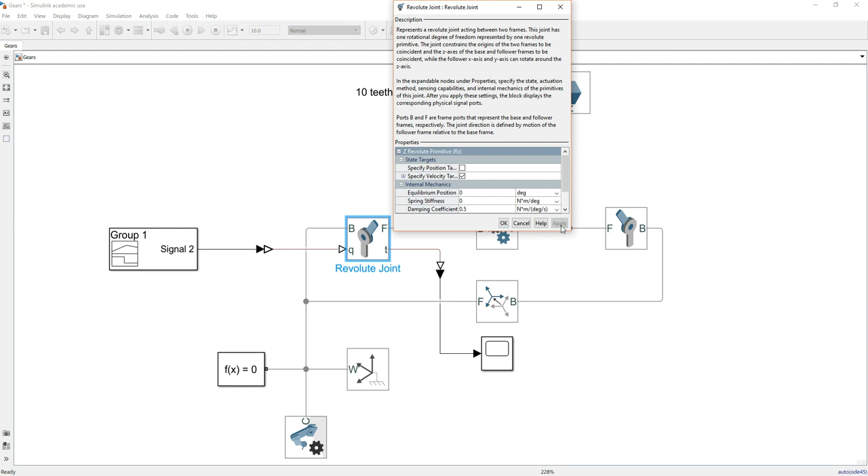And let's say we've got some idiot who thinks, I know, I'm gonna stick some glue on it, or something really daft. Let's go to internal mechanics. What I'm going to do is add a damping to it of 0.5. 0.5 Newton meter of damping is massive. So let's run it again, get back in here. Oh, damn, look at this. So let's get back on. Okay, that damping is actually, if I get back to the actual simulation, it should jam.

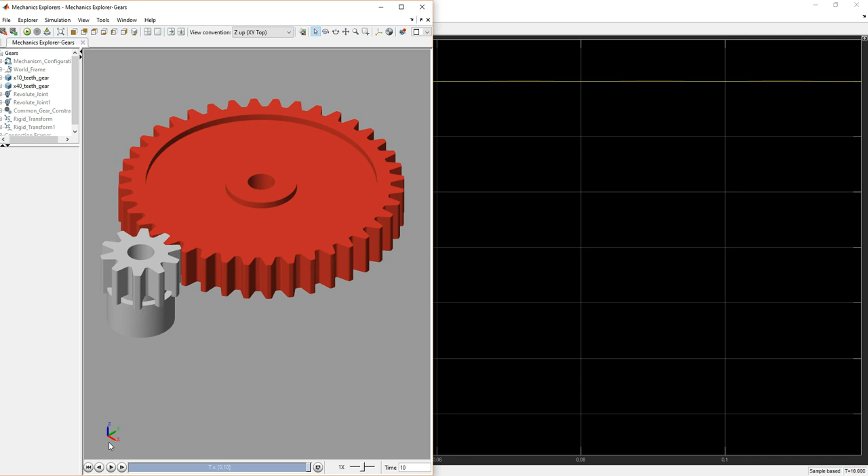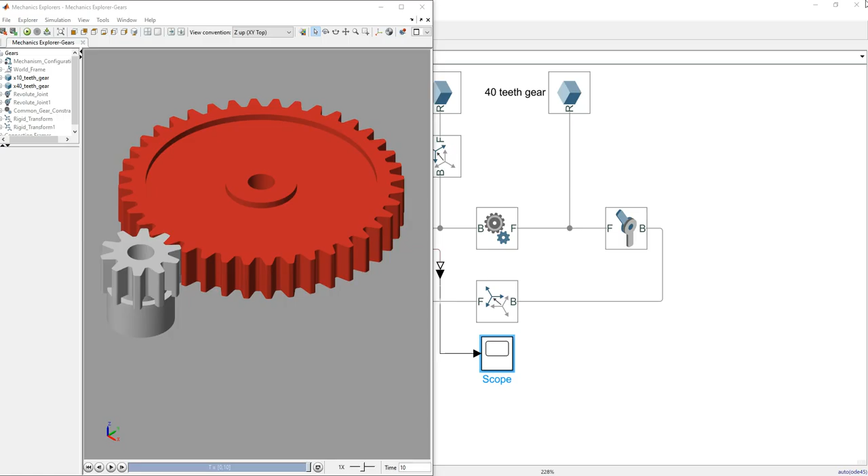Oh, that went really well. It actually didn't. The worst thing is we've taken a 20mm gear that's taking 30 Newton meter of torque to move. There's some engines that don't need that level of torque to move. Basically, we've knackered it. This was just an idea to show you that.